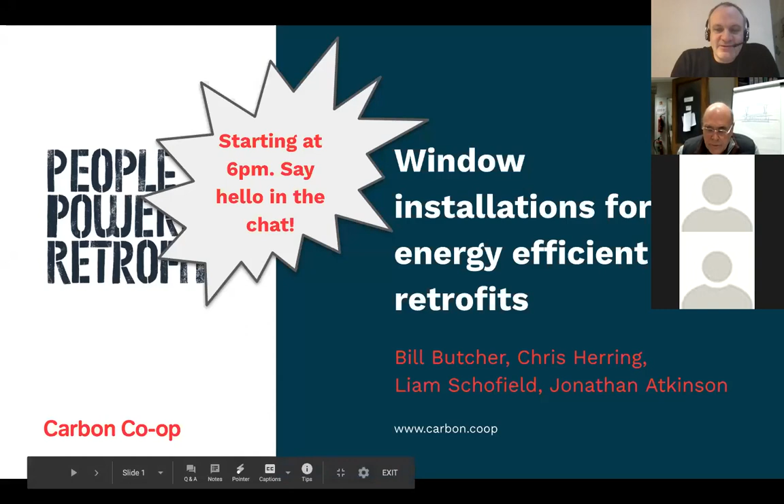This evening's webinar is about window installations for energy efficient retrofit. We've got Bill Butcher and Chris Herring from the Green Building Store, who have an amazing amount of expertise in this area. And there's myself, Jonathan, from Carbon Co-op, and we have Liam, who's also Carbon Co-op. He's a retrofit coordinator.

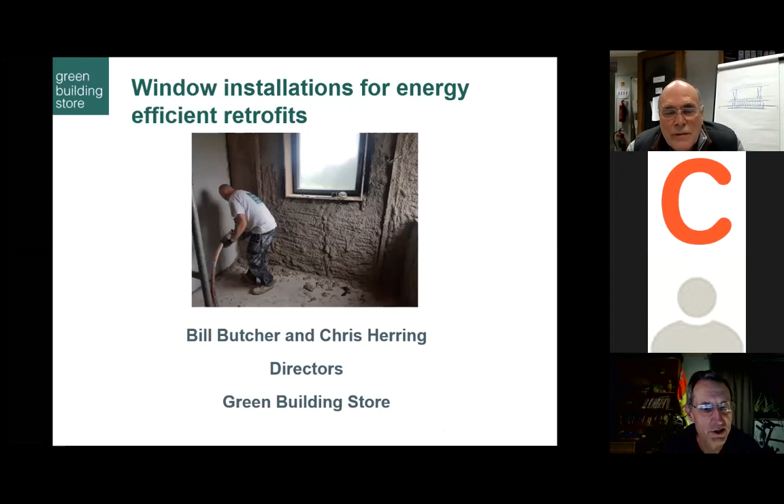While you're just finding the technology, Bill, just to say we're doing this as a double hander tonight, aren't we? Bill will be doing the bulk of the talking, I think, looking at detailing, but we're doing some basic theory as well, which I'm just going to run through, and then we'll take our questions between us. We're happy to take questions as we go, although we probably can't read the questions and answers, so we may not, if we miss it, don't worry, we'll come back later. Liam comes in with the questions, yes. Liam's going to jump in, right? Yeah, that's fine, I don't think we need to worry about that.

Hello everybody, thank you for coming along. This is the new world, isn't it? COVID, and how strange it is one year on, and we're still here. Anyway, Chris and I are old folk, I suppose. Just talk for yourself. We started Green Building Store in 1995, I think it was.

Mainly to supply green building products, to put it very crudely. One of the first things Chris brought up was that there were no green windows at the time, both in terms of low toxicity, because it was a time of Rentokil and all the horrible wood preservatives and paint systems, and also good glazing systems with sustainable timber, which at the time were rotting. So we farmed it out to others back then. We started in a garage and a shed, didn't we? We did indeed, yeah, we're not much better off now.

It was actually toxicity that started us off, because I and our third partner had both been ill with chronic fatigue syndrome in the late 80s, and we did a lot of research on wood preservatives as an exposure, which we'd been quite heavily exposed to during running small building companies. So that's the question we asked: we want high performance windows, not PVC windows because of the issues around PVC. We want timber windows, but not the very toxic chemicals used at the time, things that are now red listed. So we looked for alternatives, and that's how we started.

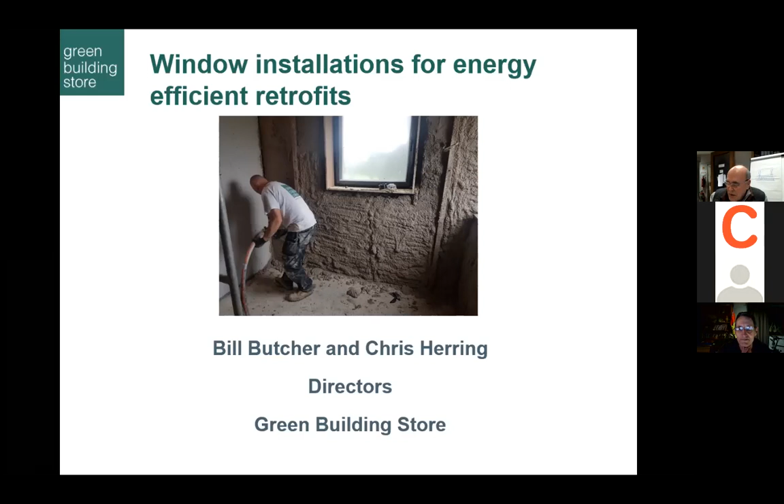Right, that's my first trip up. Why didn't that work?

So what are we going to talk about? Thermal bridging around windows - how do we fit windows into openings, and the actual window styles in terms of thermal performance. We're not going to go into the aesthetics architecturally. Obviously airtightness, and then later we'll consider retrofit timing - when windows should be replaced, and whether it can be done in conjunction with other measures, in other words the whole house plan. Then we'll look at a few case studies, both for internal wall insulation strategies and external wall insulation, and where we position windows in that case.

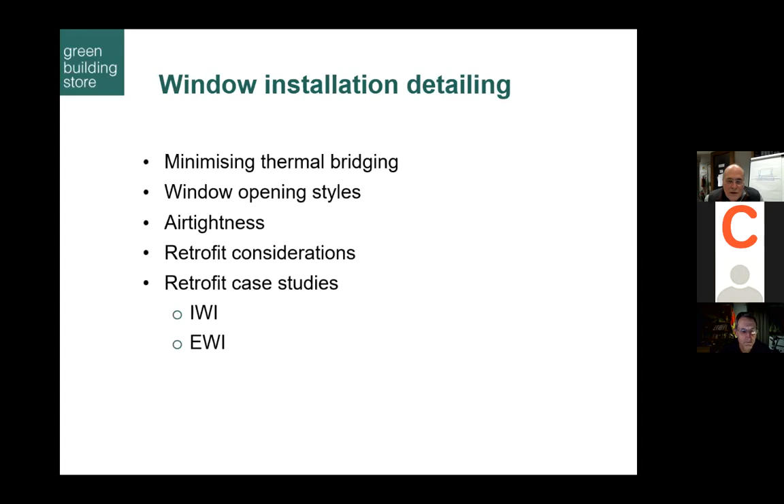So, thermal bridging - windows and doors constitute a substantial break in the insulation layer or building fabric, even if you haven't got any insulation yet. Moving forward, all walls will have to be insulated unless you're in some sort of historic building, I'd suggest. We talk about U values a lot - a very good triple glazed window at 0.8 U value is still going to be 3-4 times worse than the wall insulated next to it, at about 0.3 for internal wall insulation, for retrofit. New build is right down at 0.15 U value, or should be. So you can see windows and doors are potentially a big heat loss.

We also look at the general principle of design for windows and doors, to maintain continuity of insulation as far as possible. We'll talk about triple glazing against double glazing a bit. Triple glazing gets down to 0.9, 0.8 U values, whole window values, not center pane, as opposed to building regs which is 1.4 at the moment. In the way we make our windows, there was only 10% difference in cost between the two, so for that drop in insulation value, we felt there was no point doing double glazing anymore. So ideally this means windows and doors are within the insulation layer, and then the structural issues around how the windows are actually held in place.

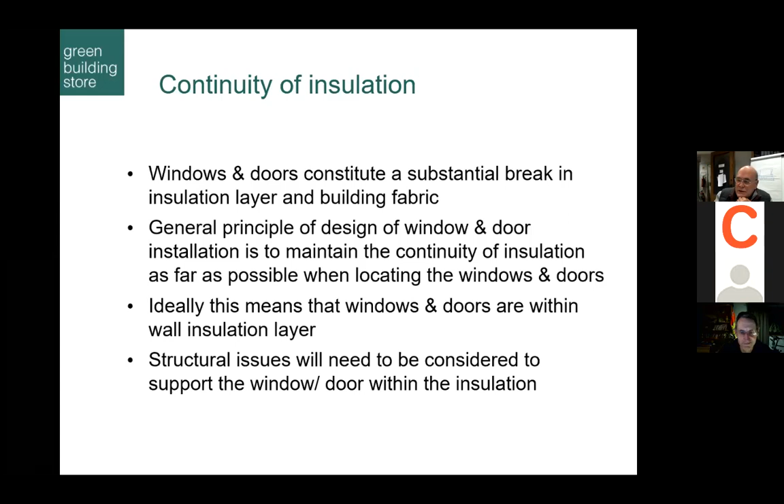Anyway, oh, sorry, there's somebody knocking at my door. Can you just do this one, Bill? I'm very sorry. Right, okay, your neighbour. I'll come back in a moment.

So look, building regs are fairly crude compared to passive house methodology. For example, building regs sees the window on the left and the window on the right as the same thing. It'll have similar glass, but actually the difference is all that framing in the one on the left. And this is the case for whatever material the window is made of, whether timber or otherwise.

Anyway, there you are, Chris. Okay, sorry, it was a neighbour knocking. This is COVID life, isn't it? Living, well, in my case, working in a shed in the garden. A nice shed, but nice shed.

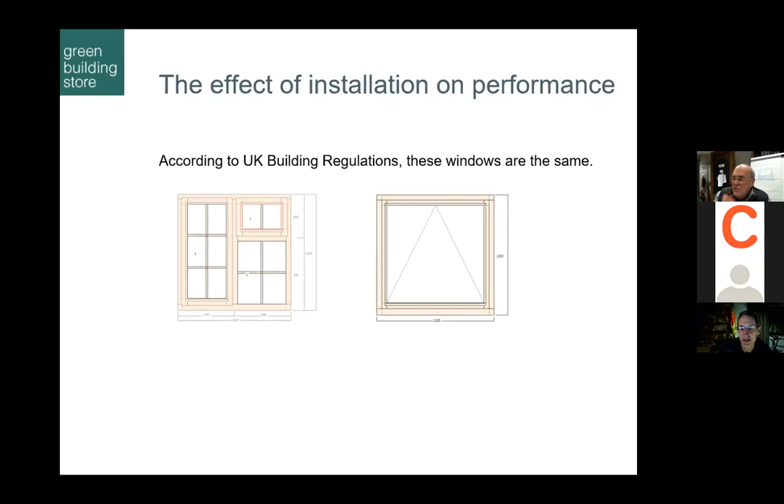The point about this really is that under the building regulations, we treat a window as a window, basically. So whatever its configuration, it's just got a standard U value. Whereas actually, this is much more complicated. So we just wanted to take a look at this and give you an idea about getting best value. I think probably move on to the next slide.

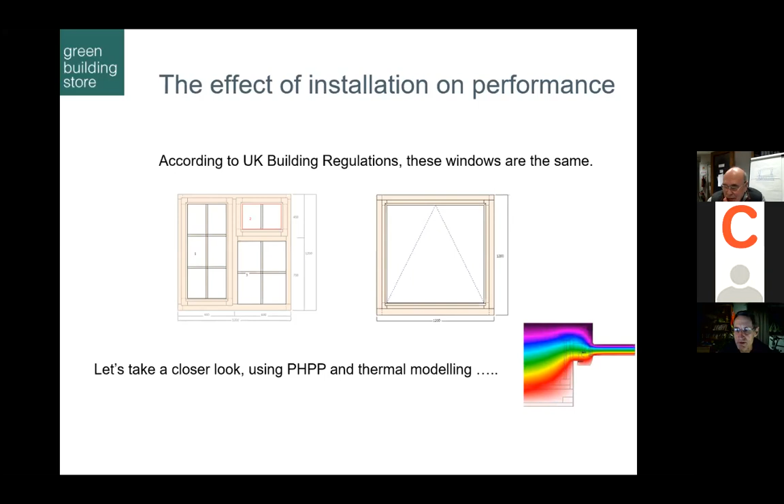So we're going to take a look at this and see the difference. If we just model these windows and see what the real U value is when it's installed, we can see the one on the right, it's a nice triple glazed window, well installed, with an overall installed U value of 0.85. Whereas the left-hand window is ostensibly the same window, triple glazed, same quality of frame, but because of all those extra mullions and transoms and glazing bars, we've got an installed value, well installed, of 1.25. So we could in effect almost put in a double glazed window, yet we've put in a triple glazed window. We've kind of wasted some of our resources by making an over complex window.

So really the lesson here is, can we simplify our windows? Can we simplify the design? We're losing light as well, and we're losing solar gain, so we're losing some of the free energy from the sun that we'd get with that larger expansive glass.

Can you move on, Bill? Yeah, you see we've got the technology here. So we're just going to step back and look at this, many of you may be very familiar with it. If you are, I'm sorry, but it just gives us a little bit of building blocks, so we can look at the heat loss through a window in a number of components.

We've got heat loss through the glazing, and that's given as a U value. As you know, all heat loss is given as U values, which is the amount of heat loss per square meter per delta T, or difference in temperature between inside and outside. So it gives a measure of heat loss. We've got the U value of the glazing there. That's often called the center pane U value.

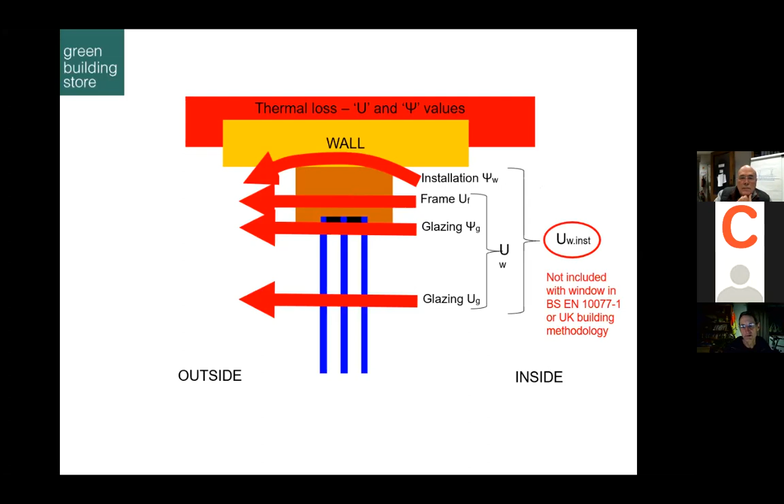And we can give a total overall heat loss, or U value, for the installed window, which includes that. Now the interesting thing here is that's not included in our standard methodology. It's BSEN 10077 parts 1 and 2, which we use to model the performance of windows. It will presumably move back to a UK standard eventually, but it's a BSEN at the moment.

Thinking about that changes the way we look at windows, because the problem with UK methodology is that heat loss is normally attributed to the wall, and it's done in a slightly crude way. It's put into a Y value most of the time, or can be put in as a psi value, but it's into the wall value, so you don't actually notice it. But if we actually take that installed U value, it starts to inform our practice and make us really think about how we install our windows, so we don't waste the good value of the window we're putting in place.

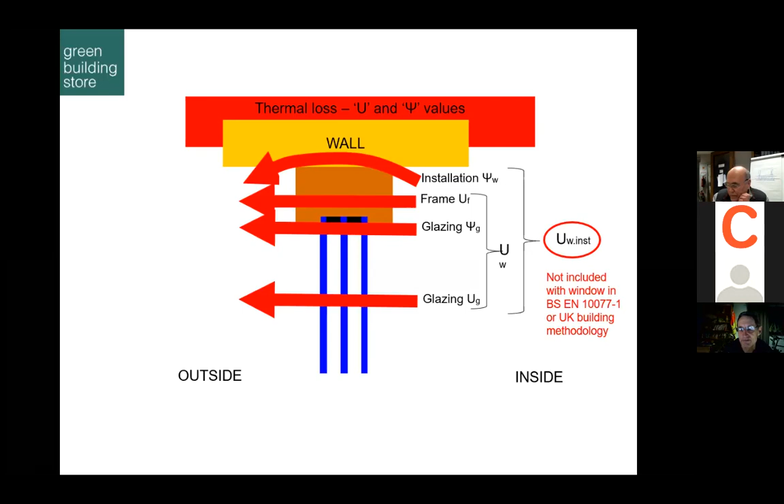So we can move on to the next slide, Bill. And this is where the science comes in. Not really, it's just formulas, but just bear with it a bit.

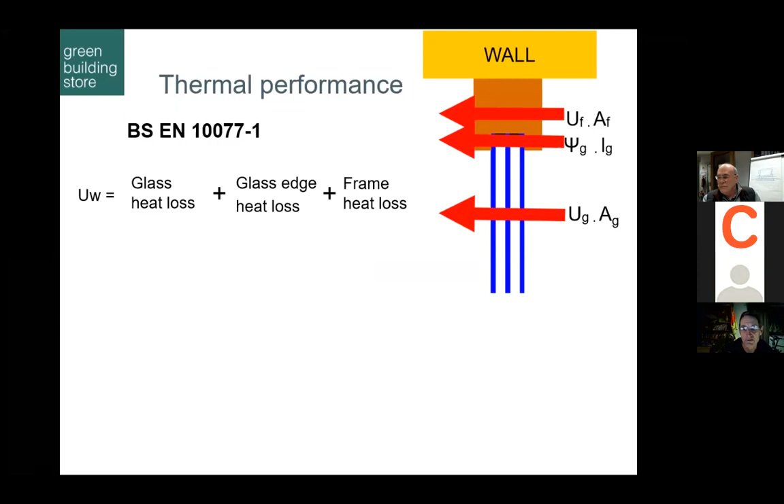So the heat loss is calculated to BSEN 10077 by adding up the heat loss through the glass, the heat loss through the edge loss of the glass, and the frame value, and dividing that by the area of the window. And that gives us a U value, and that's the formula, but that's what we're doing.

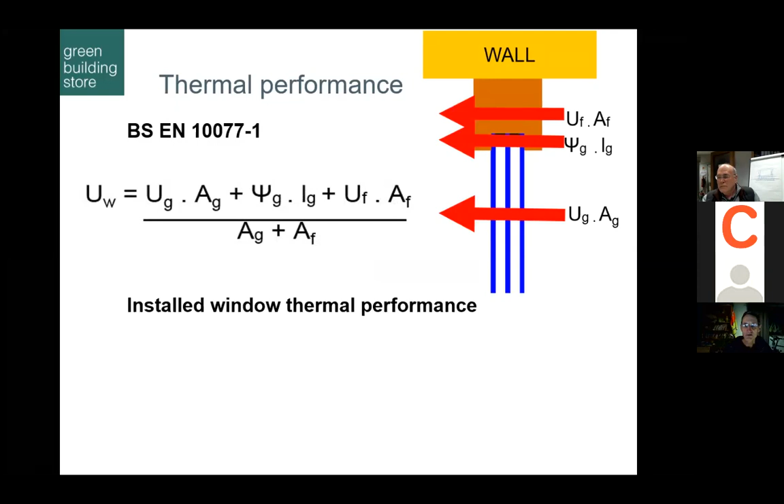Very simple. Now if we calculate the installed window thermal performance, it's exactly the same, but we're going to add on the psi value, or the heat loss attributable to that installation. If this doesn't quite make sense, it will do in a minute when I illustrate it. So we're using the same formula, but we're adding in the installed heat loss as well. And that gives us a much better discipline for thinking about how we install our windows.

And it's something we've come to take into account all the time through the Passive House methodology, because Passive House makes you take this into account. It makes you model a building properly. We did quite a lot of pioneering work on Passive House, and we still use the methodology all the time, and the Passive House planning package. So it really drives you to think about this, and then you're driven to think about the way you install the windows, which is what we really want to talk about tonight.

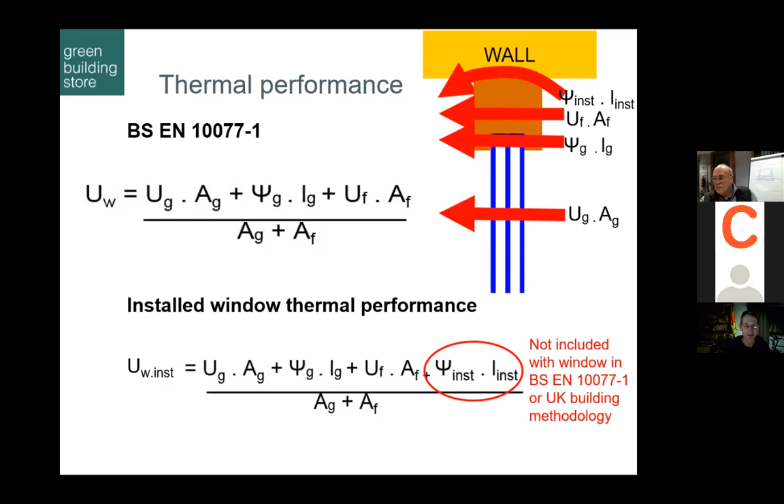So I think if we can move on to the next slide, if I remember. Oh, we're slightly jumping here, but we'll come back to the thermal bridges in a minute. But a point to make here is that every building, in fact, has an energy balance.

This happens to be a passive house. So if you take the two left-hand columns, you've got the heat gains and the heat losses. And if they're in balance, which they should normally be if you're in your house, you're balancing any heat gain or heat losses through the fabric, through the walls, through the ventilation, by the heat from your body, from how you live, and of course also your heating system and any free heat that's coming from the sun. And those two will be in balance, otherwise the building is either getting warmer or getting colder. So there's an energy balance there.

Now, this energy balance is actually for the first ever passive house. And so you can see that there's not very much heat loss from ventilation, and most of it's in the fabric, and even then it's very small.

If we take that fabric heat loss and look across, you'll see that windows actually account for about 50% of that heat loss. And this is in a passive house with triple glazed windows, the very best windows and the very best fabric. But the windows will still account for a huge chunk of the total heat loss.

That's because, as Bill said at the beginning, the windows might have a U value of around 0.8, whereas the fabric might be 0.1. Or if you're looking at a new build in the UK at the moment, let's say a retrofit, we might be putting in double glazing, something like 1.4 U value, and then the walls at 0.35. So again, you've got a huge difference.

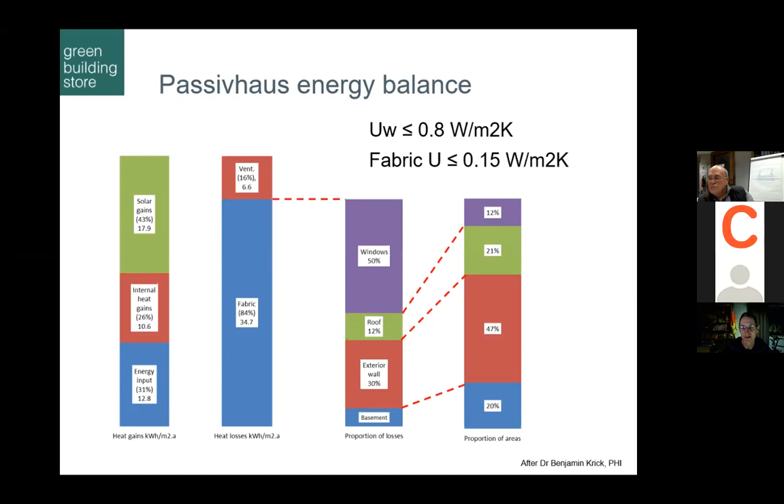So can we move on, Bill? Yeah, this is just showing the balance.

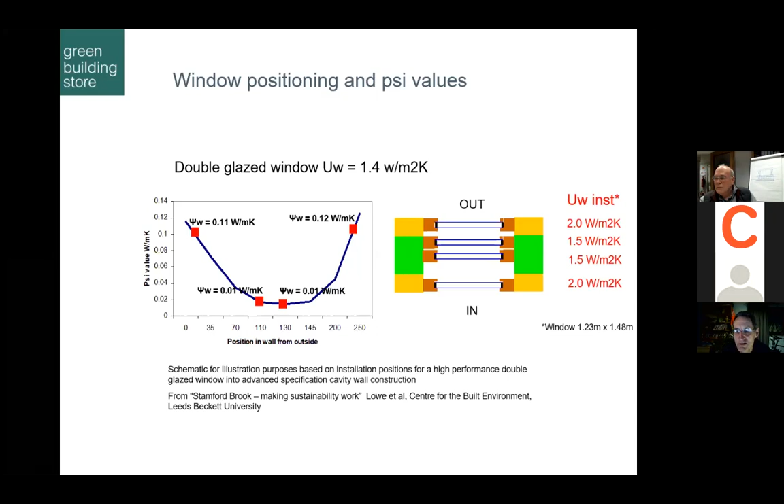But then, of course, if we put the window in the inner leaf - which I've never seen done - again your psi value goes right up, and you go back to an installed value of 2.

And this is another way of illustrating it. So here we've got - this is actually a typical German detail, but we'll look at a more typical English detail. This could be a solid wall situation in this country, with external insulation.

And here we've got the window sitting in the masonry, so it's been replaced. We've externally insulated, but just replaced the window where it was before. We've put in a nice triple glazed window, U value of 0.8 - good quality window there. And we've got a psi value there, a very high psi value, 0.26. Don't worry about the numbers, but you'll see the effect in a moment.

So if you look at that, it's pretty obvious there's a huge thermal bypass, because the heat can just transfer around the edge of the frame through the masonry. And of course you've got two problems there: one, you've got a lot of heat loss, and two, you've got a very cold surface in that reveal coming in from the window.

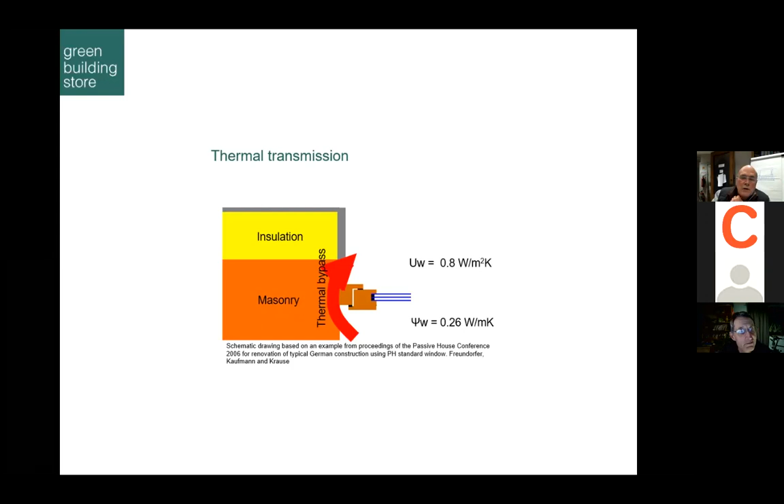So you've got a lovely insulated wall, which is warm, and then you've got this incredibly cold surface. And so you're going to get condensation and mold growth. If you haven't got black mold on there within 6 months to a year, you'd obviously be very surprised.

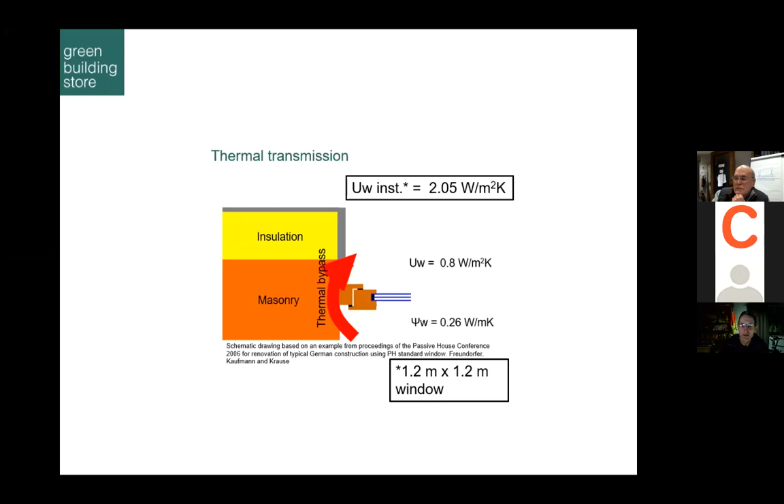But look at what happens to the window. The installed value of that window was sold as a 0.8 U value window, a nice triple glazed window. But with that awful psi value, our installed value is 2. So it's worse than a double glazed window, in fact quite a poor double glazed window equivalent. So that's just the impact of installing in that position, and that's not uncommon, you can see it done quite regularly. The effect of that thermal bridge is enormous. And yet if we hadn't modeled it as an installed value, we wouldn't have noticed it until our walls started going moldy.

So if we move the window out into the insulation like this, and even better try to bring that insulation around the frame a little bit - and Bill will be looking at the details of how we do this later - suddenly we get a lot better value. Our psi value is 0, so there's no extra heat loss, and our installed value is 0.8. So we've gone from taking a 0.8 window and losing a lot of that value because of heat loss around the window, to just by repositioning it, really optimizing the performance of the window. This is the real lesson here, and this is the bit that Bill's going to be picking up in terms of the detailing.

Could I just say that this is the case with internal wall insulation as well as external. We're just showing external at the moment. But internally it's just the same, and you're going to look at that detail. Yeah, I think there's a couple more slides for me.

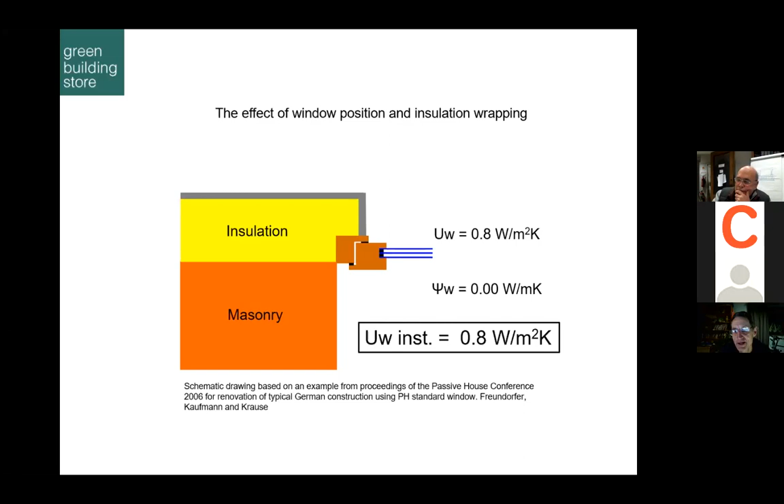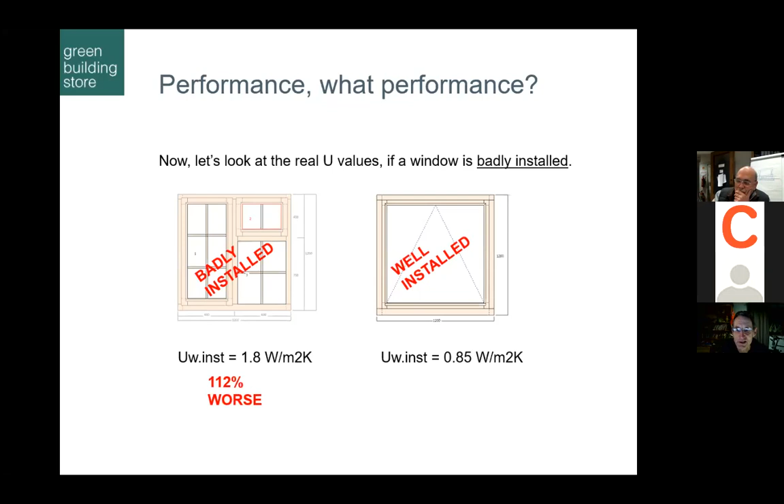So let's go back to this now. If you remember, we had a nice 0.85 U value installed for that simple window on the right-hand side, and it was 1.25 well installed with that extra detailing. Then if we install it badly and get a really bad psi value, which would not be untypical in this country, suddenly that window goes to a 1.8 installed U value. And that's incredibly wasteful - we've spent quite a lot of money on a nice window and installed it badly and lost all that gain.

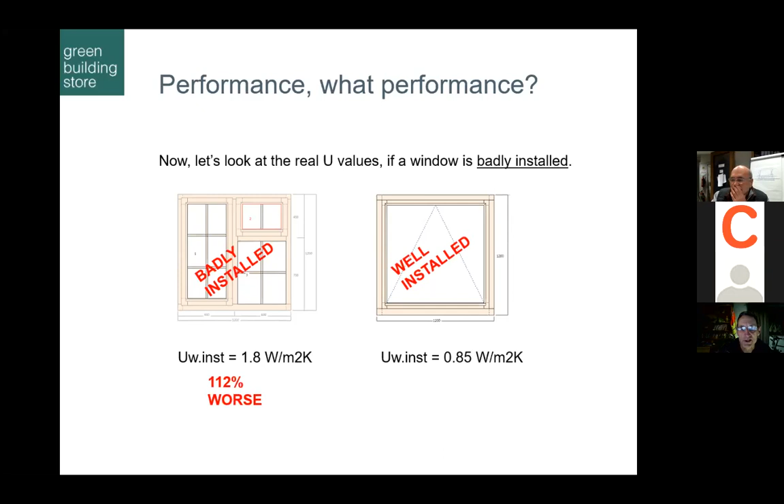So my partner's coming behind me with her bike, so there's a little bit of movement behind us. So, which was the next slide, Bill? Because I can't remember.

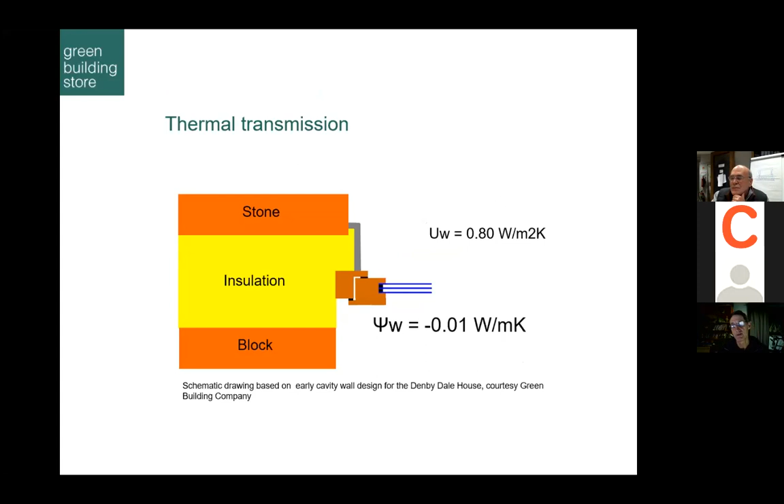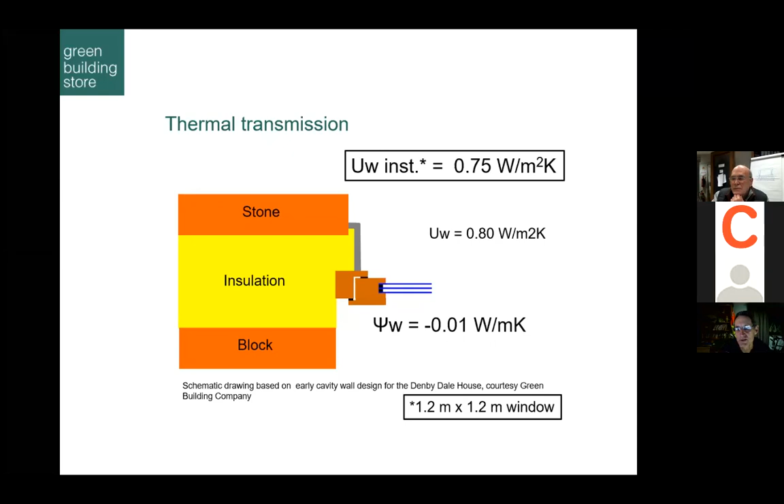Oh yeah, one more example here. This is a schematic - we built one of the first passive houses in the UK, a cavity wall construction. It's slightly simplified, but we installed the window in the centre of the insulation in the cavity wall, and we actually ended up with a negative psi value, which takes a little bit of thinking about. So the installed U value for the window actually goes down. Our installed U value, that was a nice 0.8 window, actually slightly below, but keeping numbers simple here, we ended up with a 0.75 installed U value for that typical size window. So it can make a huge difference.

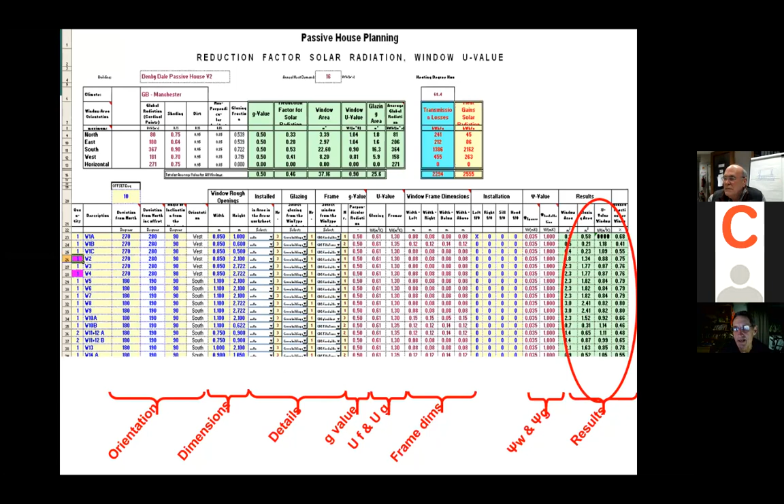Each window, it's calculating the actual U value of the window, and you can see depending on the size and exact configuration, they'll be different. So that's proper calculation, and it will calculate the installed value as well, because you're putting in the installation psi values, which we have to model. Not necessarily saying we need to do that with all retrofit, but the important thing is that we need to understand these implications and really think about where that window goes in the wall and how it's installed.

So we've got Guy McNaughton asking about the example shown for a solid wall with external insulation. What position would you use for a solid wall with internal insulation? I'll talk about that in a minute. I was a bit concerned some of these might be spoilers.

There was also a question about sash window refurbishment with slim double glazing and secondary glazing compared to a new double glazed window, and what performance difference you might get. That's mainly to do with air tightness, to be honest. Sash windows are extremely difficult to get airtight, and it's more to do with air movement and drafts than with the actual U value.

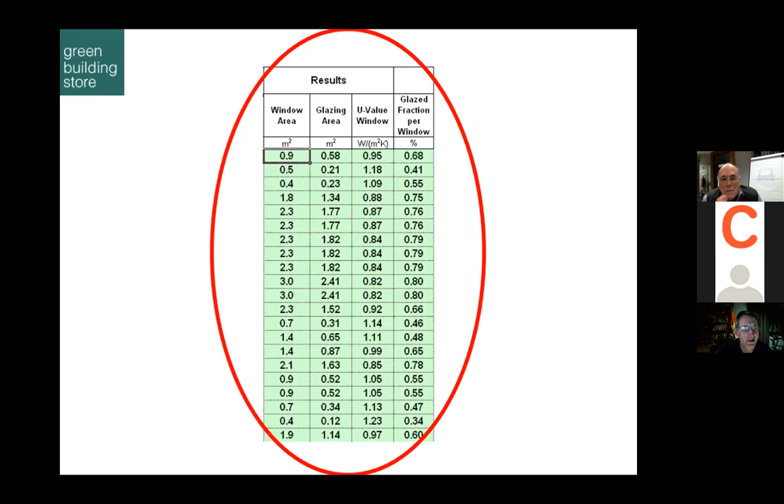There was one more quick question about changing from old poor performing double glazed to insulated timber frame triple glazing - can that significantly change the moisture content of the internal atmosphere in a room? No, it doesn't have any effect on the moisture content of the room at all. Well, except that a cold surface will collect moisture because you're hitting dew points, so you get condensation on the window, taking some moisture out of the room, but fundamentally it doesn't. Ventilation is what affects the moisture content of the room.

It does affect whether you get condensation though, because if you've got a cold surface, you're hitting dew point on the window and you'll get condensation. If you've got high humidity, with poor performing double glazing, you'll get a lot of condensation. Interestingly with Passive House, the methodology is designed to make the building very comfortable and work beautifully - there's a guarantee of no condensation because the calculations are done to ensure that.

The only thing to say there is normally in our climate, I wouldn't normally recommend insulated frames, I'd recommend solid frames, but triple glazing will give you all the benefits of no condensation.

Cool. Okay, keep going? Yeah, keep going. Right, okay, isn't it? So, right.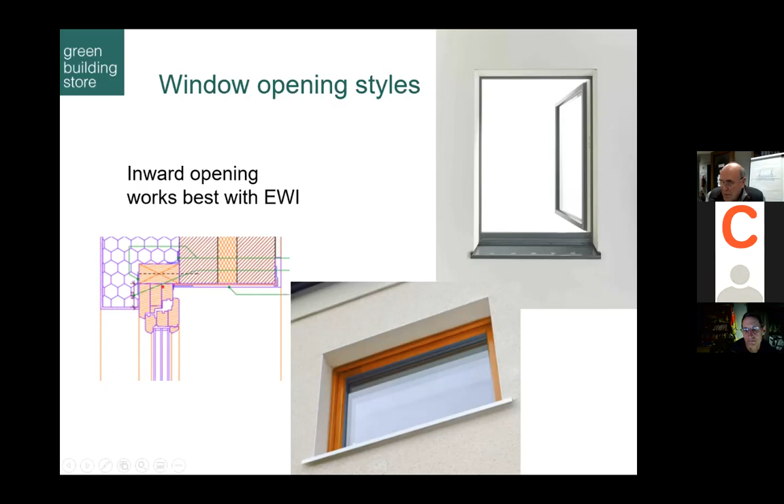Internal wall insulation is the opposite look, so outward opening windows perform best. We've got the bulk of the frame here on the inside, so that will be able to take insulation in a better way.

Here's an example, this is our friend Paul. Oh goodness me, come on Chris. Paul Sheffield. Go on, our good friend Paul. Paul Tester, anyway, Paul Tester. Yeah, this is his own.

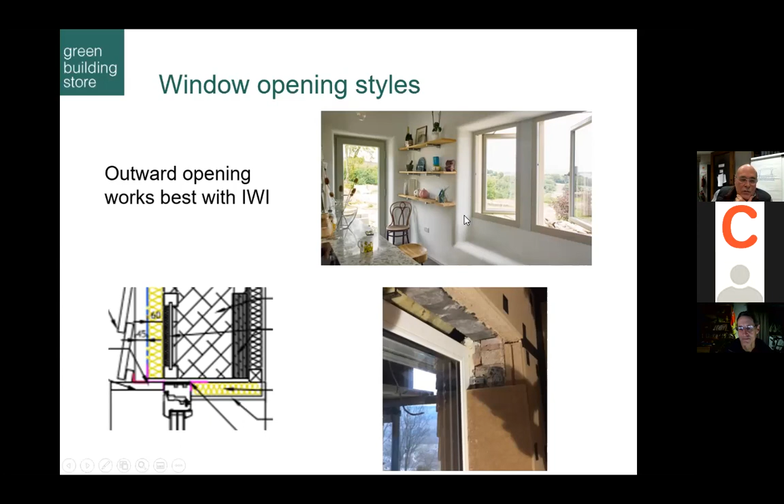This is one of our projects with that Diathonite I showed you earlier being sprayed on, again with outward opening windows. So that means we can actually take the 100 mil insulation round the corner back into the frame, maintaining our U value into the window. I hope that answers one of the questions that Liam came up with just now.

So what about air tightness? We need that continuity, obviously, both in insulation and in air tightness. What we teach in Passive House is that you should be able to take a slice through your building and draw a red line - always red because it's on the warm side - all the way around your building, ideally without taking a pen off the paper. That will include maybe concrete, wet plaster, renders, plywood, OSB, tapes, membrane, whatever. What we want is one continuous line. You've heard this many times, I'm sure: one leaky bucket inside another leaky bucket is a leaky bucket.

So the window is part of that red line. We need to tape into it, have good seals, and have the glazing put in properly as well. We've been called back in the past for glazing not functioning properly. Well, almost anything that can go wrong does go wrong at some point - lessons learned in life. So yeah, we put it right, of course, and we continue to find out about trouble as well, learning more things that can go wrong.

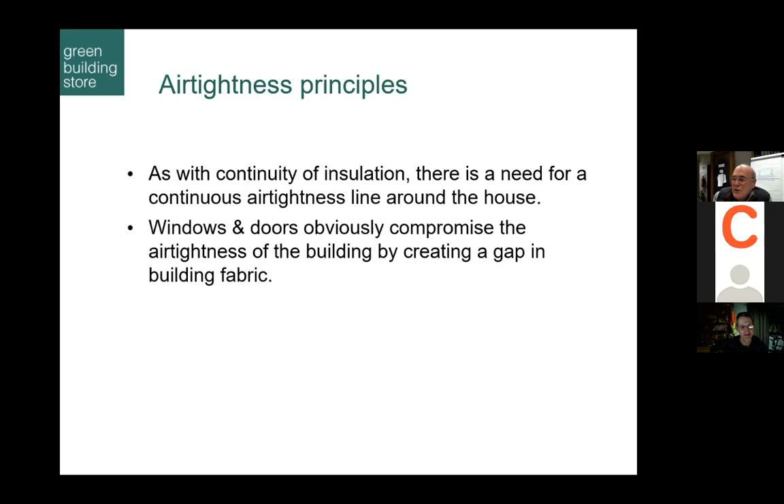Windows and doors compromise that air tightness of the building by creating a gap in the building fabric. There are different classes of air tightness. A good window should have a class 4 air tightness - this is BSEN 12207, and there are classes 1 to 4.

They're tested, but it's not mandatory to test windows in this country. It is in many countries, under the CE marking. Since January 1st the world has changed, but up till then we were subject to CE marking, and we're in a transitional arrangement whereby CE marking is still accepted until the end of the year. All construction products subject to a harmonized European standard should be CE marked, and that includes windows. It's all changing this year, and by next year we shall have a UK equivalent to the CE mark that every window supplier will have to move over to.

No, we'll see about that, Chris. I'm not trying to get you chuntering about Brexit, Bill.

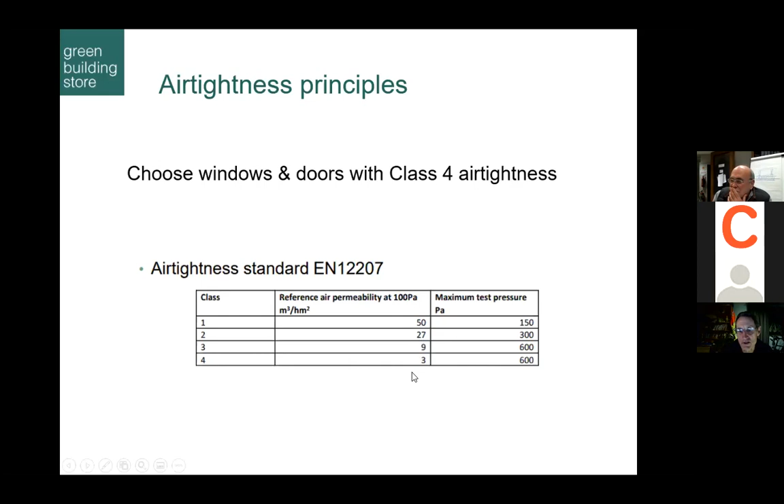At the moment, different European countries apply the CE marking differently. So it's not mandatory to test to EN 12207, but all good window suppliers will have done so, and really should be looking at a class 4 air tightness, which is the sort of air tightness you want for passive house and for a deep retrofit. So just look for that, basically.

One other thing to talk about is seals. One of the nice things about windows is to reduce the sight lines, because they look a little bit more elegant, and also you get more glass in relation to the frame, which means a little bit more daylight and a bit more sun coming in. So you improve your solar gain.

I'm illustrating timber windows here, but PVC windows often have quite fat profiles anyway. You find that often a second seal is sacrificed in order to get a slimmer sight line. We don't think that's a good idea. We think two seals is much better, and even if that's a slight compromise in the width of the frame, it's sensible to get those two seals.

The reason is because seals in the end can be vulnerable, and if one gets snagged, you lose your air tightness. If you've got two, you've got a much more robust and long-lived air tightness. Obviously, seals can be replaced, but often people don't, so they're living with poorer levels of air tightness.

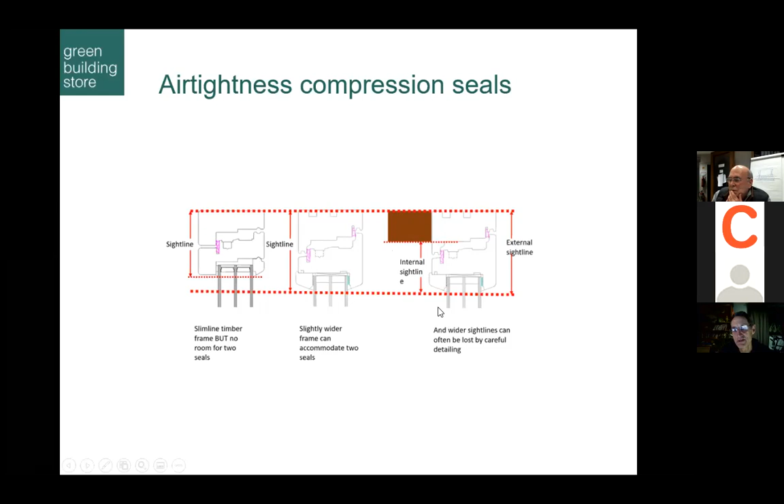You can mitigate slightly fatter frames by the way you detail them. If they're an outward opening window, you can bring reveals in, or you're bringing insulation in, and you lose some of that effect of the slightly fatter frame, to give a more elegant look. So there are ways around it as well. We would always advocate two seals. Obviously, if you can reduce the frame height and have two seals, that's great, but there's a limit to that because of the simple geometry of the frame.

I think back over to you, Bill. Right, so air tightness. Crikey, we've only got a quarter of an hour left. Well, we're mixing questions as well, aren't we? So yeah, we've got time.

Obviously we're trying to minimize the air penetration, so we would recommend proprietary air tightness tapes for that red line. Remember I talked about that continuous red line on the drawing.

With external wall insulation, one could have an air tightness strategy on the outside of your wall. You would actually be taping to the outside. That air tightness strategy might be with EWI, it might be the renders, or it might be the adhesive, or a vapor membrane actually. With internal wall insulation, you will want to be taping internally.

Obviously, for weather sealing, there are several different ways of achieving that. Traditionally, silicone, or we often use burnt sand mastic round here in West Yorkshire because of the stone, which can be all over the place basically. So rather than have great lumps of silicone everywhere, we tend to try and use this burnt sand mastic.

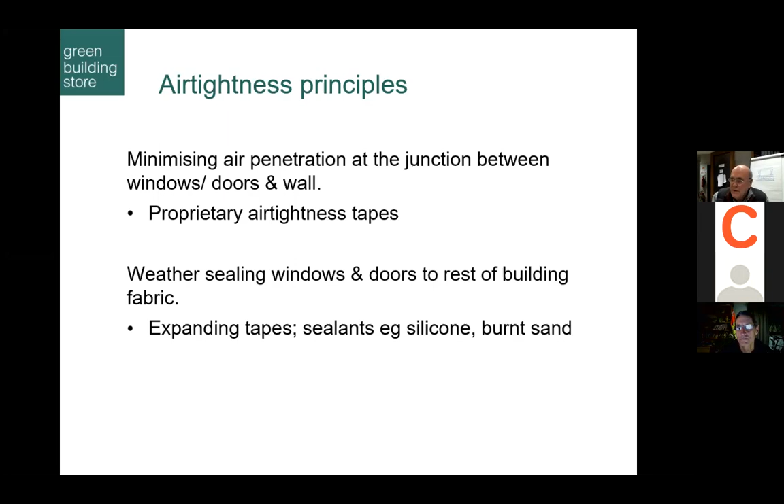So this tape we use an awful lot, it's called, obviously, as it said there, Contega. And this has got a fleecy finish to it. This can be used just as an air tightness layer onto plywoods or membranes or whatever, but it also takes wet plasters and renders, and that is the air tightness strategy in its own right.

All these tapes have an acrylic glue system, which is extremely good actually. We're lucky that they've been developed abroad, namely in Germany in this case, and have got accelerating life expectancy of well over 100 years now, actually. And they're very good, these tapes. They do work.

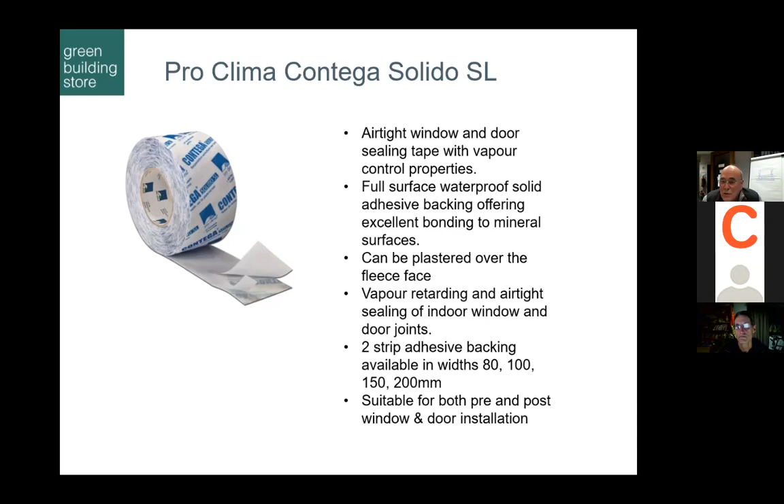If you get them on wrongly, you'll never get them off again, so one has to be a bit careful. There's another version called SLD, which has a third adhesive strip on the other side here.

Here we're showing Andy pre-taping a window before installation in a plywood box, and look how careful we have to be. That's called a rabbit's ear, and that pinch takes up the slack between the size of the window and its opening. We always allow a 10 mil tolerance, as structural openings, even in new builds, are never going to be exactly square.

So what will happen there with Andy, we'll put these straps on the side, screwed into the side of the window, and then screwed into the reveal. Here we've got a plywood box. We use plywood boxes to hold windows out beyond the wall or in the middle of the insulation, just as Chris was showing.

Our air tightness strategy is: window tape onto the plywood, then our Contega tape again onto the blockwork, then wet plaster onto that Contega tape. So that's our red line. I hope that makes sense.

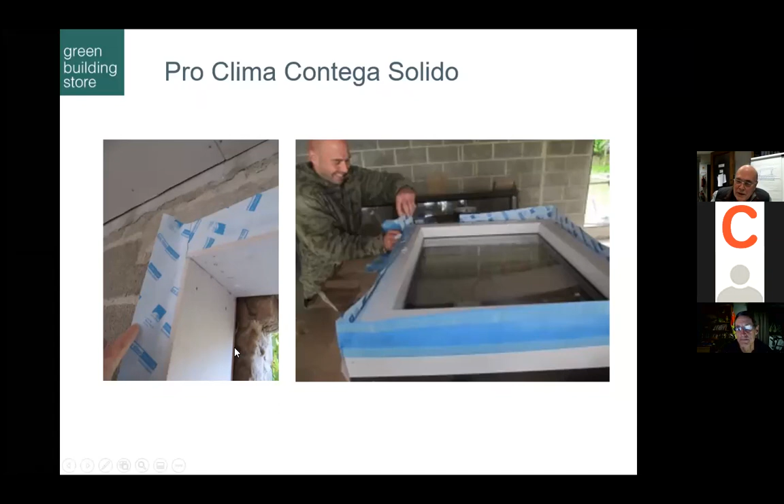So that's pre-taping. Post-taping is when you've obviously installed the window, just as I've said. If you imagine that half a ton of window I talked about earlier, up a scaffold in February in the snow, you cannot really guarantee that the pre-taping will stay on as you try to get it in. So quite often we'll use either method. They're both as good as each other, but the pre-taping is actually quicker.

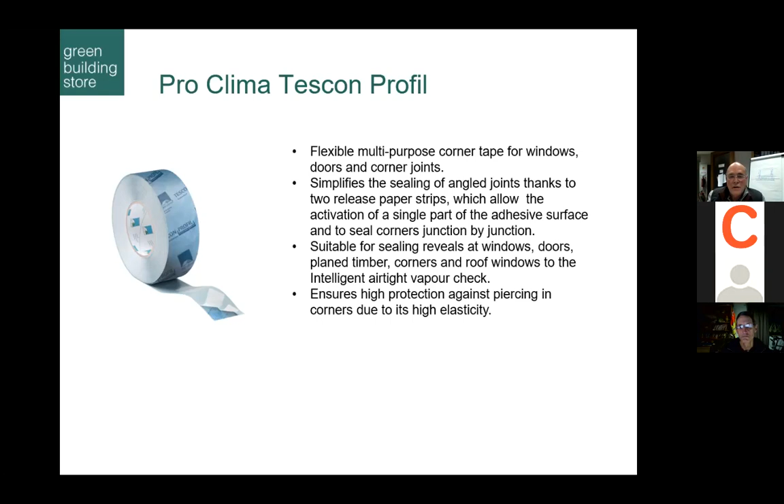For post-taping we use this material called Profil, and it has two tear-off strips - a 10 mil and a 50 mil. The 10 mil goes against the frame, and the 50 mil against the reveal, obviously, but don't take it right round the corner.

We cut this tape into 4 sections, and then make up a little pocket, which we stick into the corner. This 10 mil will then be able to be covered by plasterboard for a good finish.

We have to really make sure that this tape doesn't go over the line that's going to be covered up by the reveal, either plywood or plasterboard and skim, because this tape fuses into our pre-finished window and you can't get it off again. There have been some tragic cases where we've had to replace windows because it's been done badly.

This tape is great for repairing jeans, saddlebags, the back of books and motorbikes, by the way. It's quite expensive, so one has to use it very sparingly, and it comes down to design - it has to be buildable, else you'll be all over the place using lots of tape, not very effectively.

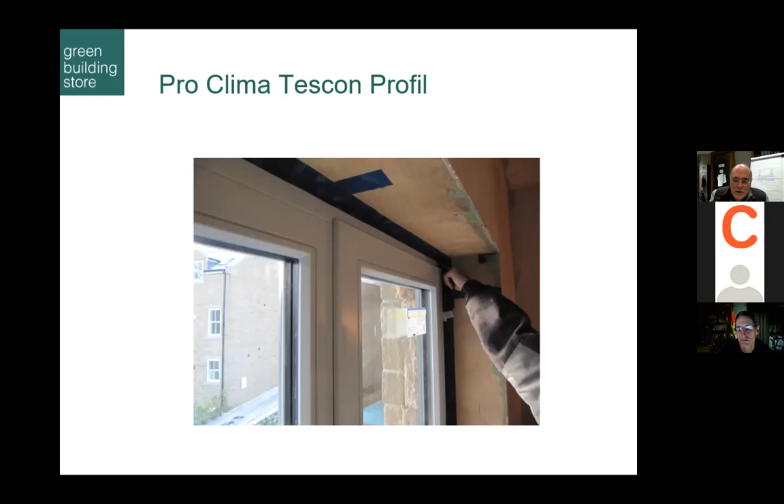It has to be dry and relatively dust-free. So this trade of taping is a bit, well, some people say like dressmaking. I think it's an attitude of mind - it's not rocket science, it's just that I sort of joke.

You need to have done meditation before leaving home, hopefully not argued with the kids, not got a mobile phone on you, listening to Radio 3 all day, and just get on in a very methodical way.

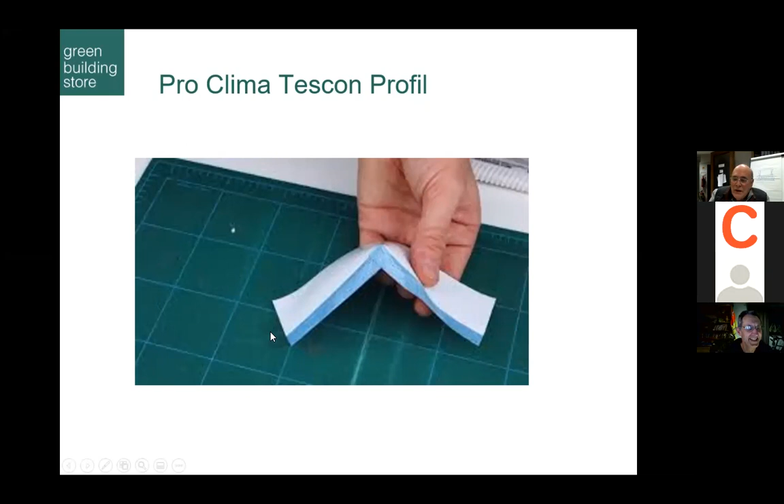You last do meditation before leaving home, Bill? Well, I basically must say that I'm the worst at it, by the way. I must say that I prefer Radio 4 for airtight taping. Oh, right, well, fair enough. Yeah, but you can get mad then, can't you? Then that's - we've got an Air Tightness champion here. Yeah, well, that's true, actually. A Radio 4 Air Tightness champion. That's interesting, that's another debate, Liam. Right.

Outward opening windows, IWI. Look, this is an example, and we want this sort of at least thought pattern. If it's going to be a job done in the traditional way with architects and all the rest of it, this is the sort of detail we need, particularly for builders that aren't used to doing building work to this level. So we'll want to specify the tapes.

We want to tell them whether it's Contega or Profil or Tescon or whatever. These are the sort of details we need to go through, both in new build and retrofit. So here we have an example of outward opening windows in a timber frame.

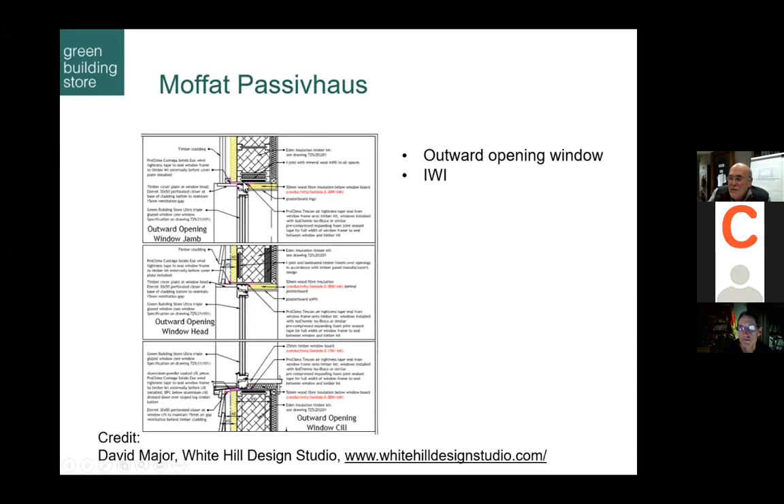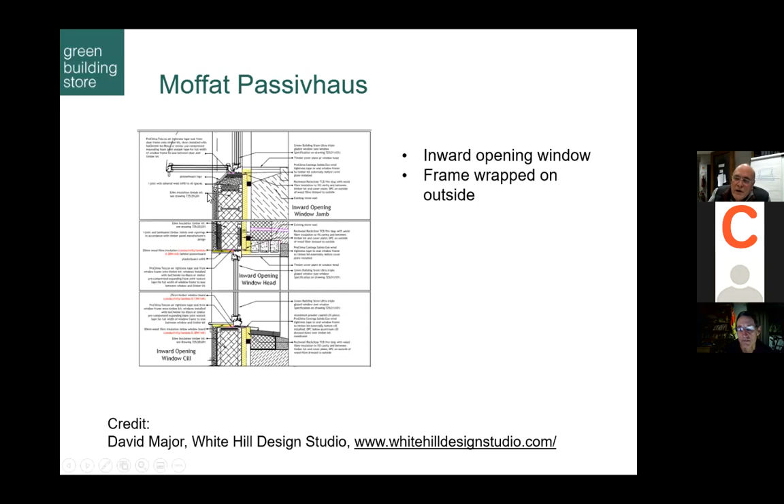And here we have an example of the other way around. This is outside world and this is inside, a horizontal section through a window or door opening. Look what they've done here, interestingly enough - they've got a sloping, what would you call it, a raking reveal to let in more light. That quite often happens with thicker walls.

Thresholds are a really difficult detail. Remember, we're talking about thermal bridging detail - we've talked about windows and thermal bridge details. What we have with thresholds is also structural issues, obviously, people trundling over here.

This is an example of, and we use this a lot actually, where we use this material called Compacfoam. This is a heat-treated, heat-altered polystyrene that has a lambda value, I think of 0.047, something like that. So it's still pretty good, but it's structurally sound. And look, we can saw it, route it, screw into it. So here we use it to bolt into the side of the slab.

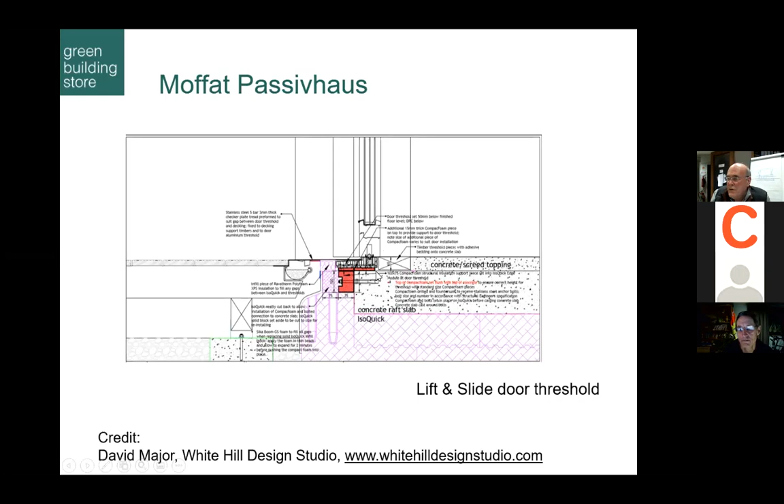What we often do is actually cast our Compacfoam into the slab. We'll have a threaded bar set up here, and it almost acts like formwork for the floor to be floated in. Then you can put another piece on top when the screed gets done. This is a neat way of getting thermal performance and a Part M compliant threshold, Part M being the building regs for mobility access. Same with lift and slide door sets, same sort of thing.

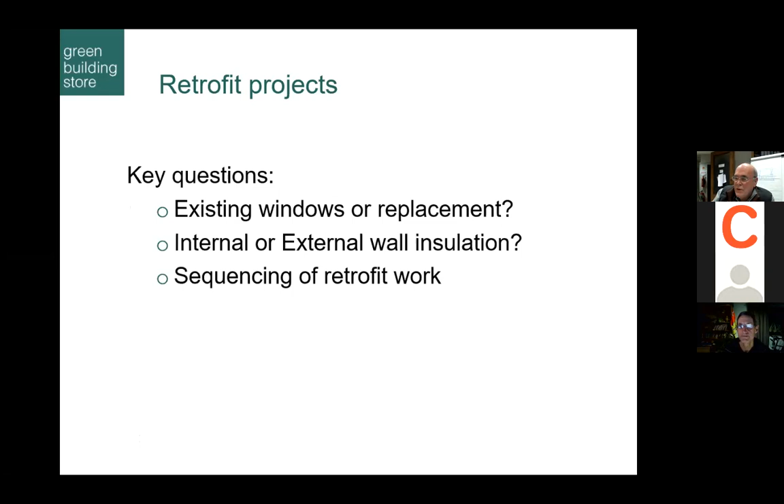So, retrofit project - key questions. What happens when we've got existing windows, do we replace? Questions about back again to IWI or EWI, and then the sequencing of retrofit works, because often you can't do it all at once.

If the windows and doors are to be replaced, it's a lot easier to ensure continuity of insulation, as they can potentially be repositioned closer to the insulation. Remember what Chris was saying earlier - what we want is a whole house plan, looking at the building moving forwards over the decades. If we're going for external wall insulation, and replacing windows before it, do we put the windows out, or do we do it temporarily in the same position and move them later?

Also be aware with internal wall insulation, if we move the windows further back in - because a lot of 1960s houses were sort of pretty shoddily built, in my opinion, and 70s too, where the windows were positioned right close to the outer brickwork, with wooden subsills, as that was the cheapest way of doing it. So what we tend to do is move the windows back in for better performance with IWI. But one downfall is the painted mastics left on the brickwork when you move the windows back in, which can be quite troublesome to get off.

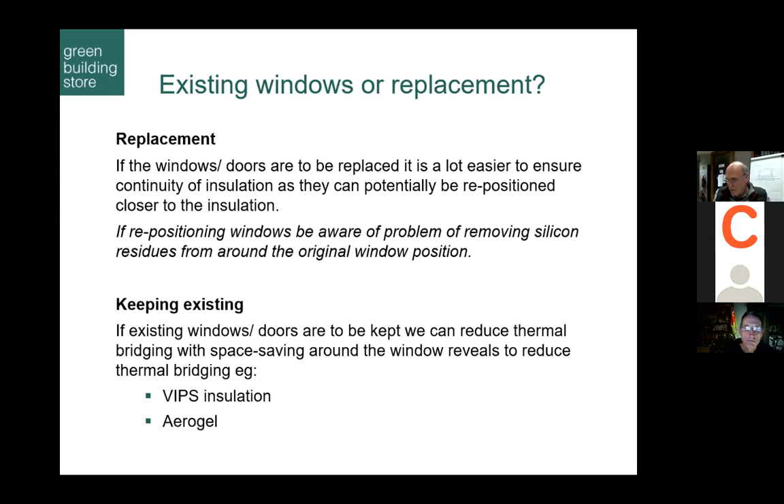So to ensure continuity of insulation, windows must be ideally placed - we talked about that already. So with EWI, we tend to push the windows further out towards the insulation.

We ideally want them at least to the front of your masonry, so that the insulation can cover the frame, as we saw earlier. We can leave them in the same position, but we've then got the detailing of taking insulation round into the frame. Remember the heat loss of badly installed windows.

Better still is actually holding the window out in the insulation itself, so the frame is completely wrapped. We'll show some examples of how that's done in a minute, with brackets or plywood boxes.

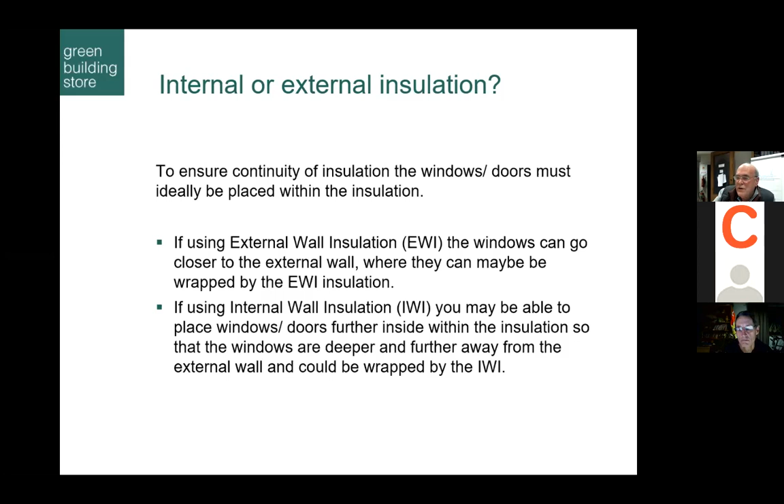So if using internal IWI, you may be able to place windows further inside so that the windows are deeper and further away from the external wall. But of course, that depends where vertical DPCs are and how your existing external sill is constructed. We usually have to put our windows back in the same position with IWI, to be quite honest.

So with retrofit and step-by-step methodology - by the way, Passive House has an EnerPHit step-by-step certification route now, where you can do the steps, get it certified, and pass it on to other owners of the building - recognizing that to rip out a reasonable plastic double glazed system that's been in there for only 5 years is just not sensible.

So with EWI, you could replace the windows and doors and locate them in position flush with the outside, with the EWI to wrap it later. But of course we have to be very careful of weatherproofing then, and actually aesthetics. I don't know how well it would look, to be quite honest.

Or could you put them in the original position with straps? Remember these sort of things, to then be let out, to be unscrewed and pushed out when the EWI is done. If you're installing the EWI first, any replacement windows would need to be pushed out later for obvious reasons.

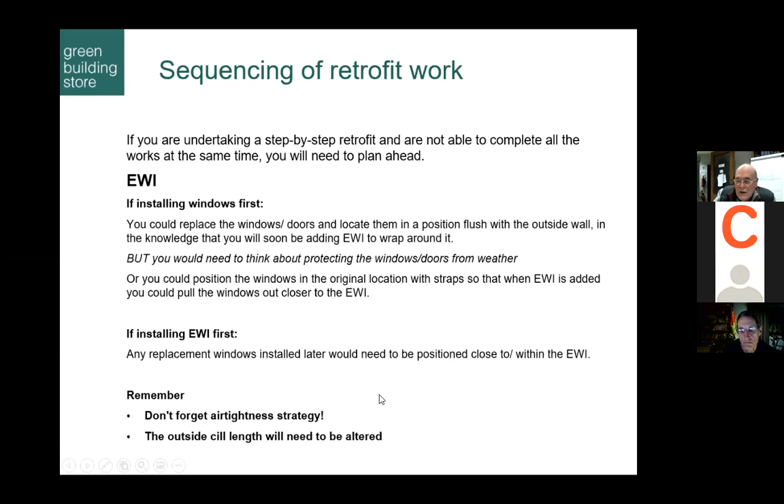And don't forget the air tightness strategy - how's that going to work, both in the temporary position and the long-term position? And obviously the sill will alter as well.

So if the windows can be removed from the outside, one has got to think about whether, if you are going to replace windows later but have done IWI, internal wall insulation, you're going to be able to get the windows out from the inside or from the outside, for example. All these things you're going to have to think through.

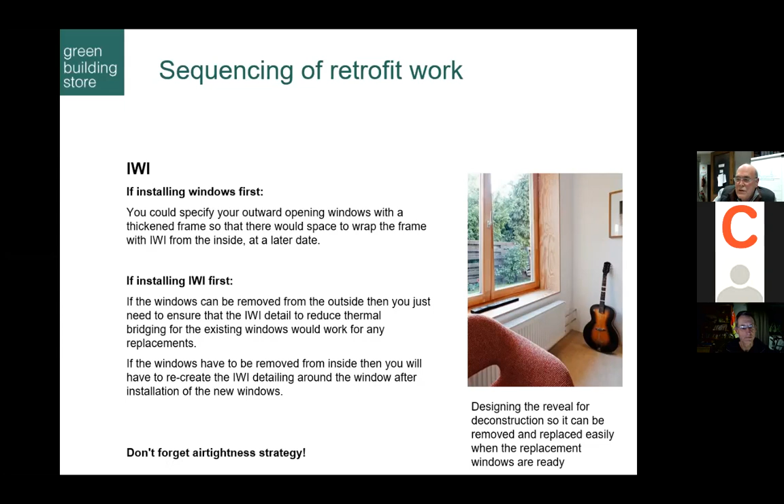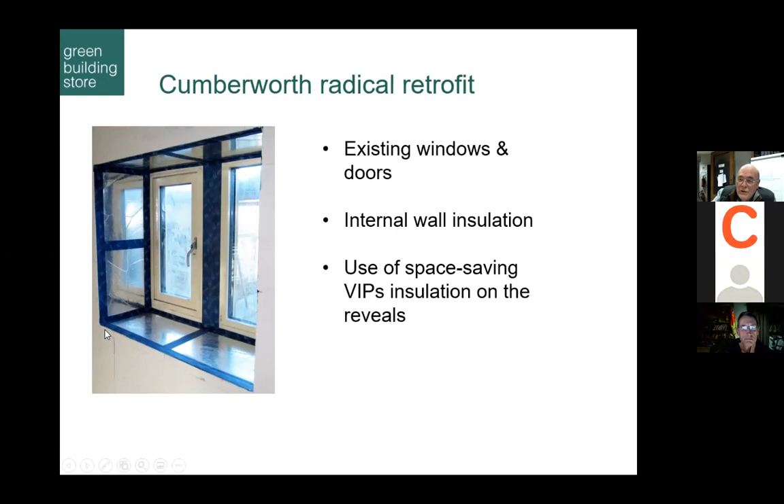This is an example where we're bringing in that Diathonite, and what we've done here is far more radical. When you see a barn or a house that needs totally wrecking, you rub your hands and say, great, that's going to be economic to do.

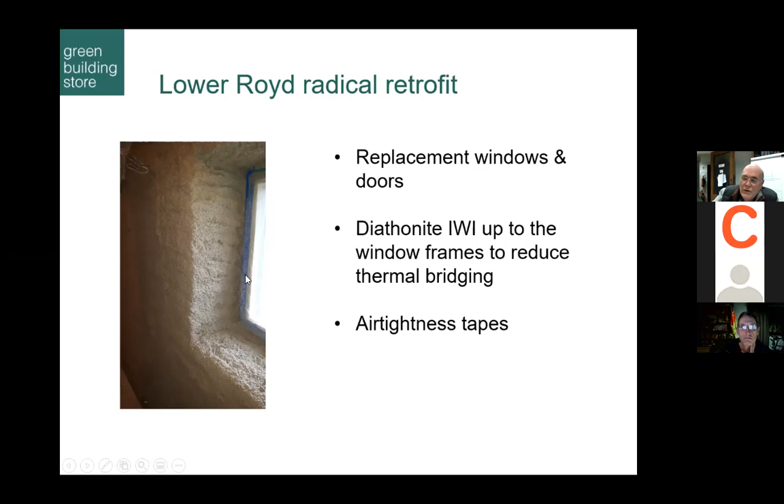We actually made the internal aperture bigger than the external so that we could get the same 100 mil of Diathonite round into the window frame, outward opening windows. And here we are - this is where we can maintain that same thickness, a 4-inch into the back of the window and door frames.

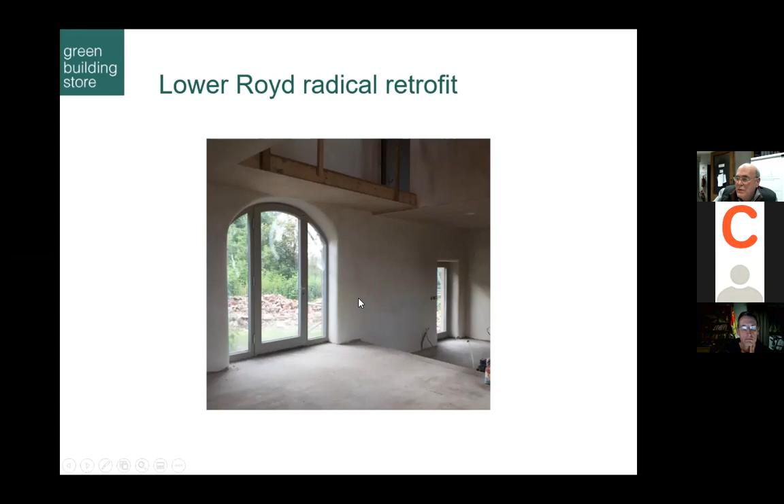This is back to Paul Testa's job - look, we've seen this earlier. All the same principles going into outward opening windows, look, with the thicker bit of frame here.

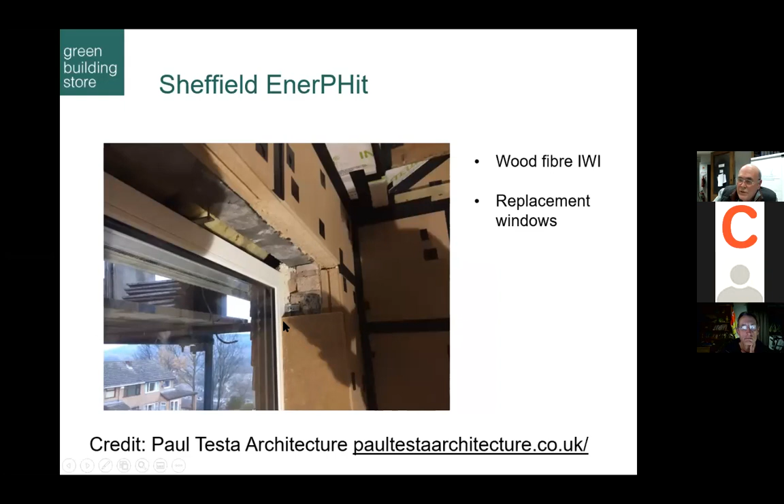And here we are with another job by Paul, where the windows, I think, in the existing house have been brought out to the face of the wall here, ready for external wall insulation. That looks like they're outward opening windows, so that must have IWI in that part of the build. This is external wall insulation with inward opening windows.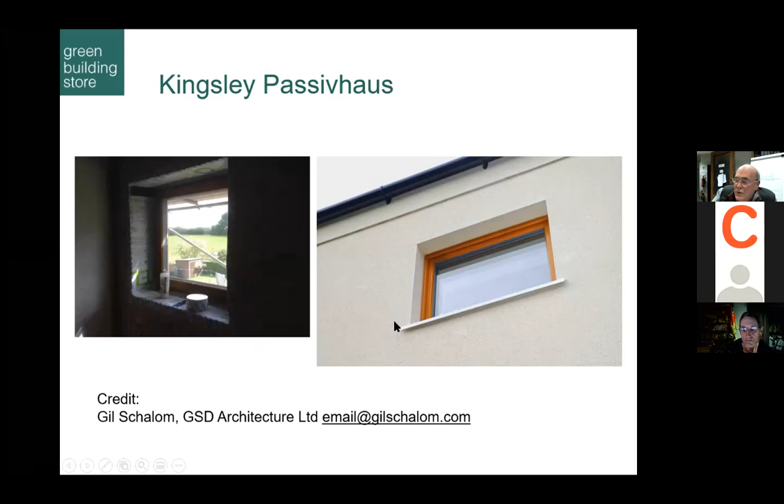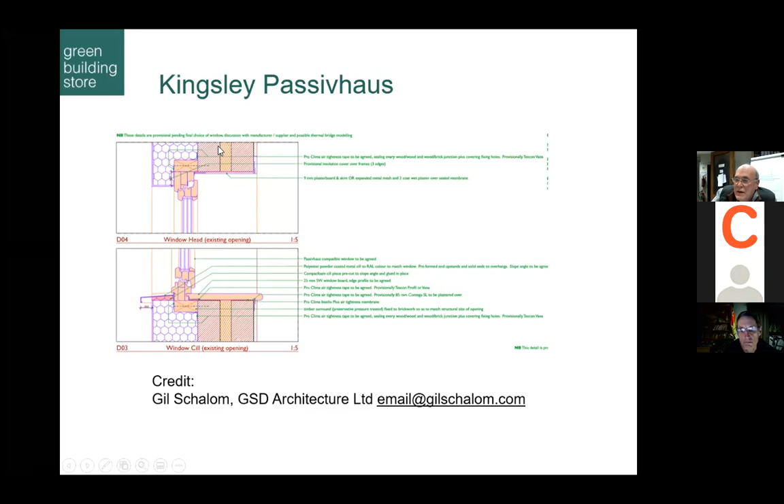No transoms, all glass. That's as good as we could do, actually. Here we are again. Oh, this is Gil's job as well. In fact, I'd asked him, how did he get air tightness in the cavity here? Easier said than done, I would suggest.

Right. Now, to get the windows to perform even better, look, these are inward opening windows again. We could bring them out into the insulation. This methodology is using plywood. There's a box section to bring them out. And here again, look, it looks like the air tightness strategy is on the outside underneath the insulation. This is where our red line is here.

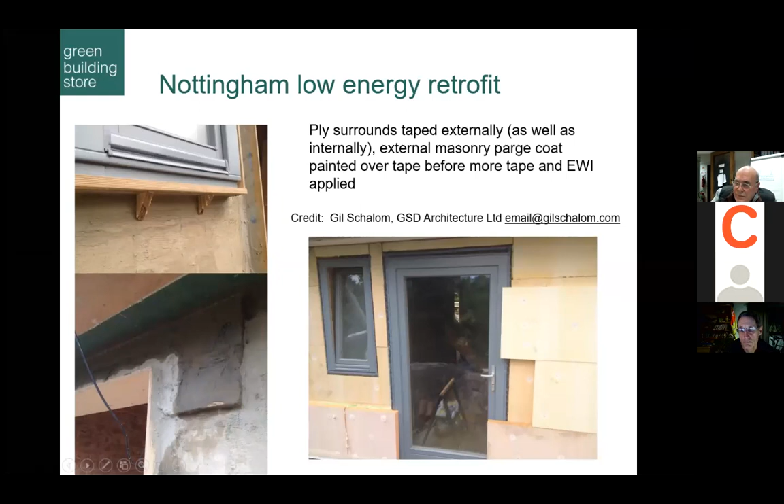So we'll be taping from the face of the window round onto that masonry here. We can also use the compact foam system. So a lot of windows are hung out with a batten of this, at least underneath, to hold it out, or all the way around. Sometimes we'll use some of this on the bottom of windows, screwed into the front of masonry for EWI, and then some metal brackets on the jambs and maybe the head.

That makes sense. Here we are again. Look, this is pulling out the windows and doors on ply reveals here.

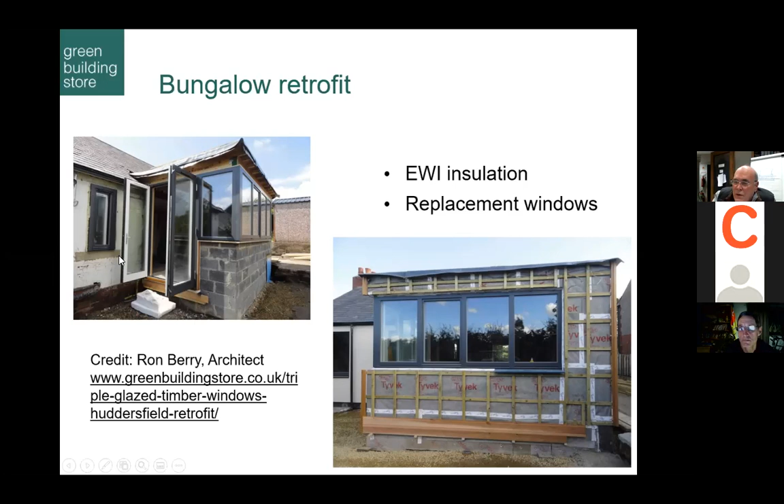Okay, and this is the yes, here we are, look. So this is an existing bungalow. There was our existing sill. I'm not sure whether they've actually snapped that sill off so that it's made flush with the rest of the wall. Probably have actually. So they'll then put the external wall insulation over the inward opening frame with probably the aluminium. Yes, they are the aluminium sills covering the EWI.

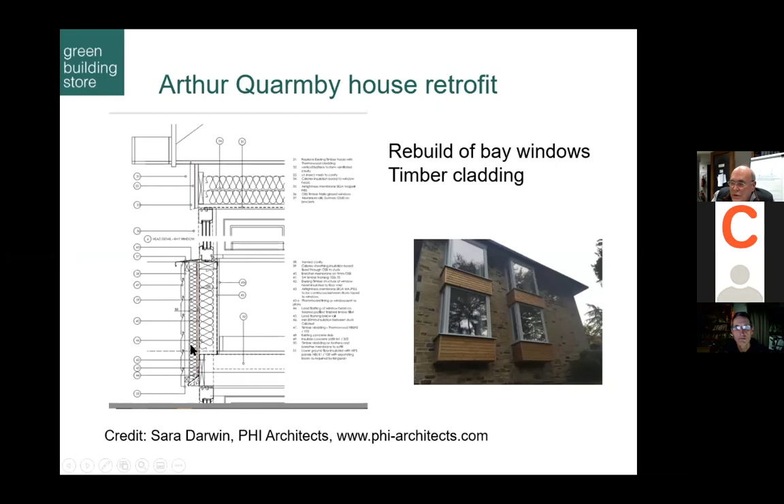Here's a nice example by Sara, our friend Sara Darwin from Stockport. This is a job for Mike and Carol, I think it is, in Almondbury, where this is a quite famous house by Arthur Quarmby. So she wanted to maintain its architectural integrity. So we look at the detailing, it's lovely detailing here of cutting out thermal bridging and so forth.

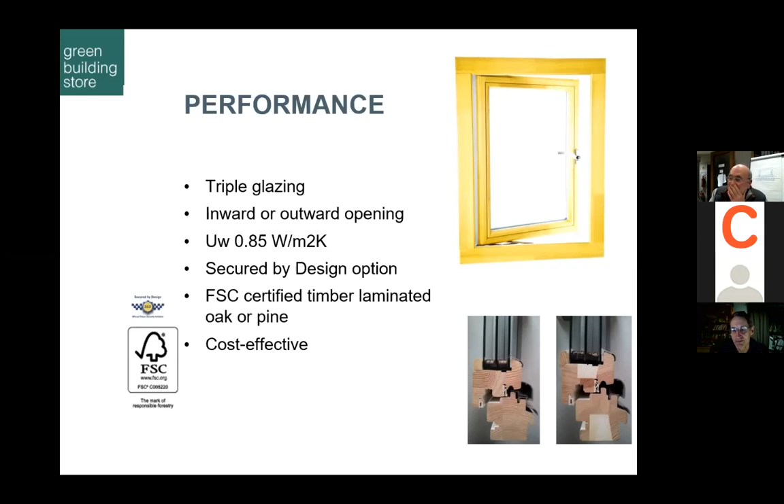And I know some of the Carbon Co-op people have our performance window. So we've got 3 ranges of windows, and our performance and ultra are our 2 main ranges, if you like. This is performance. They're all triple glazed. The performance is slightly less deep than the ultra range. They've all got Secured by Design. They're all FSC certified, and they're available inward and outward opening. So this is performance, and there's a picture.

You can't really tell anything from that. And then there's ultra, which is a deeper frame, so it's got a slightly deeper glazing unit. We've got a Passive House certified version of this with an insulation core, which we tend to steer people away from. And I think this is answering one of the questions. But generally, although most of the UK is warmer than our climate zone for Passive House runs into Central Europe, if you like, runs into Germany.

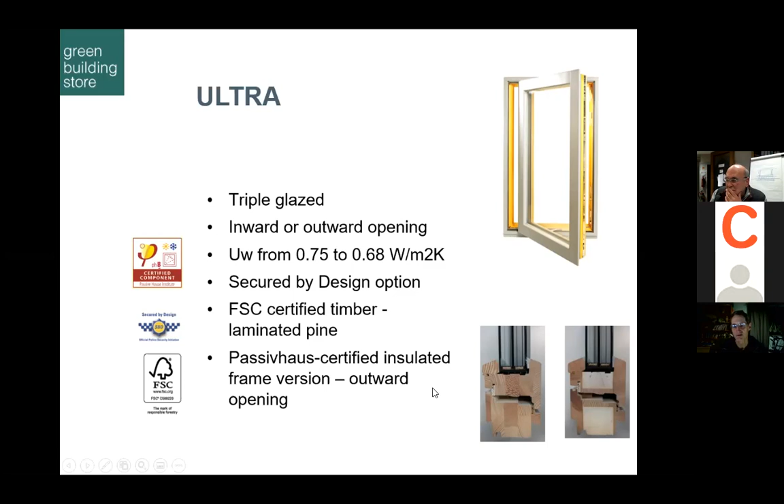So we're all in the cool temperate zone. And to be honest, England and Wales are warmer. So it's not quite as stringent, and we can certainly get to Passive House performance with a solid framed window with the good triple glazing. So this one that Bill's put the cursor over there. But we can always advise you on that, so no problem. This is the ultra in position, again there.

And then our final range is our progression range, which is quite a specialist window because it gives you a very particular aesthetic, because the frame is buried in effect, and you'll see in a minute. So the whole of that is covered, and we get this look of just looking in and all you see is glass, whether it's opening or fixed, it looks the same. It's also a very high performance window. It's designed to be a leading edge Passive House window. It's accordingly expensive as well. So this tends to get used

Here are another of Bill's props. There we are. That's the new version with GRP outside.

But you can see that the sash is buried. So when that outside bit is buried in the wall, you can't see the sash. All you see is glass.

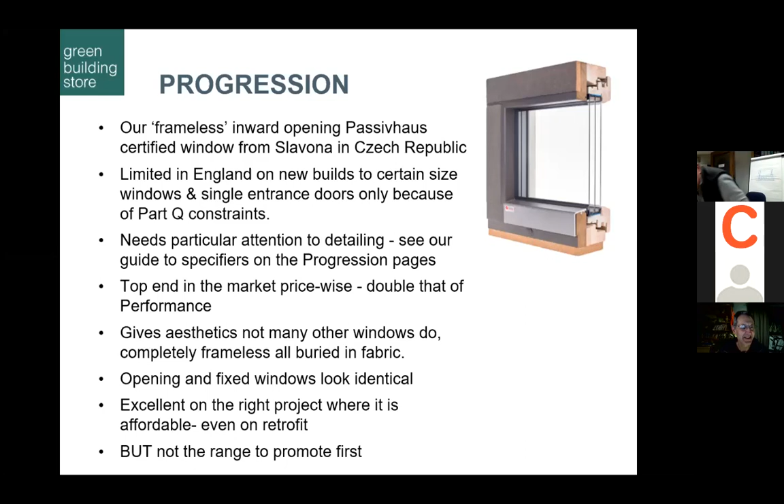You're right, actually. But this approach is specified by certain builders and architects who want that aesthetic and want the performance together. But generally, I wouldn't necessarily recommend it just for performance, unless the budget is fairly generous. I think it's a fairly expensive window to produce, but it is quite unique in what it offers.

But it is beautiful, Chris. It is beautiful, it is beautiful. I would have it if I was building my house—I think I would do without the flash kitchen and have these windows personally.

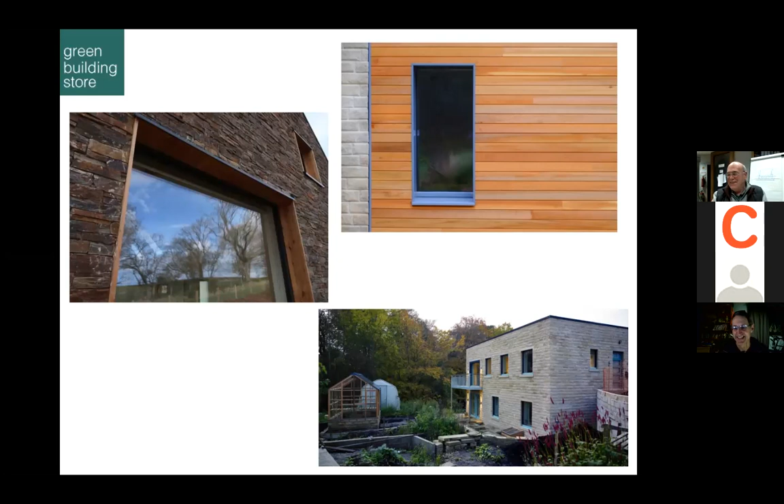Get rid of the gold-plated taps, would you? Yeah, maybe I would too. Yeah, but I'm just making the point—and again, if you're doing a retrofit, you probably wouldn't choose it.

Just a last point to say, in terms of sales, we offer more than most window companies do, in that we'll help you with technical advice on detailing. If you're building a passive house, or modelling passive house even for your retrofit, we've got all the PHPP-ready data for all our windows, and—terms and conditions permitting—we will do installation psi-value calculations as well, depending a bit on the size of the project. So that's all part of our package, and that's us. And we can take some more questions.